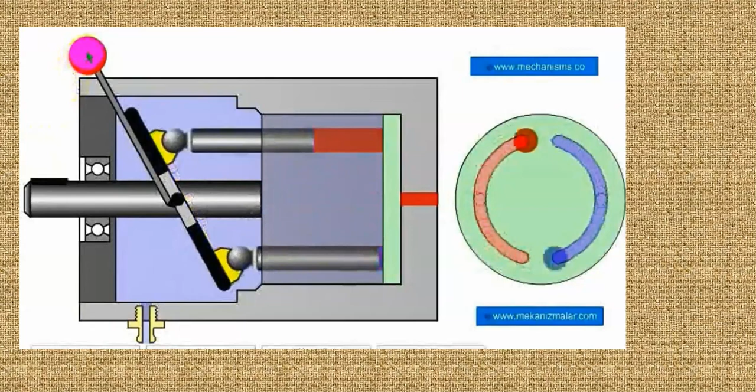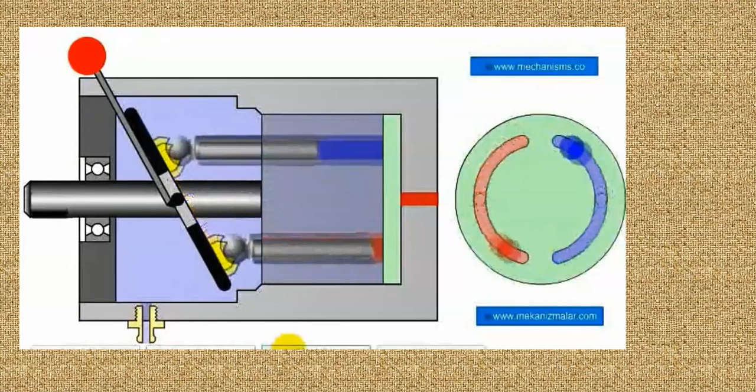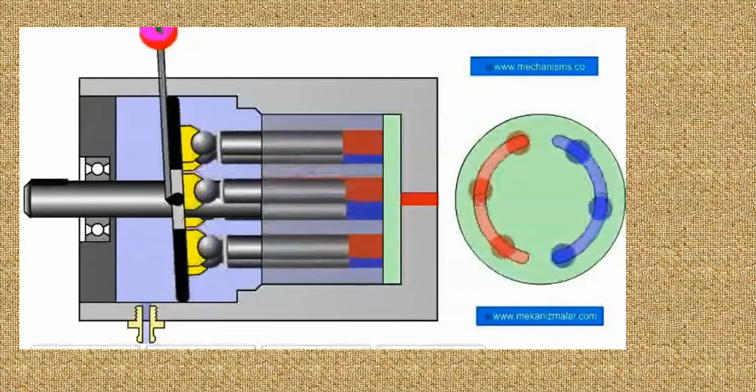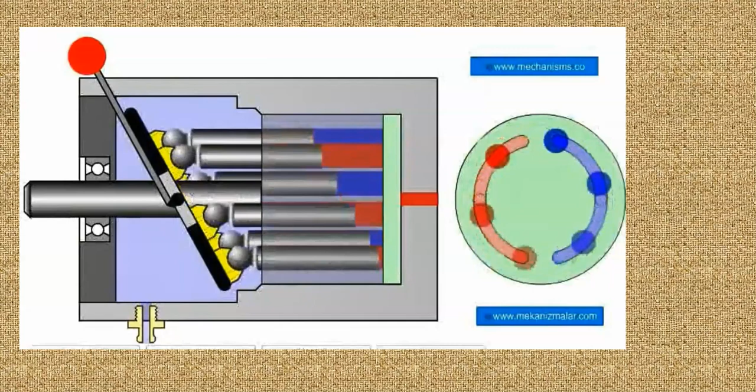Now we have two syringes. One's sucking in while the other one's squeezing out. Now we're going to increase our output. And what's increasing is how much fluid we're sucking into each syringe. It's actually a piston. Now here's all our syringes put together. So this pump has a whole bunch of pistons, and the swash plate will vary the output for the portion of flight. So if you can imagine taking off and you put the landing gear up and the flaps up, you need a lot of fluid. So this right here is the high output. The swash plate is at a high angle. When we're in cruise flight, we don't need as much fluid.

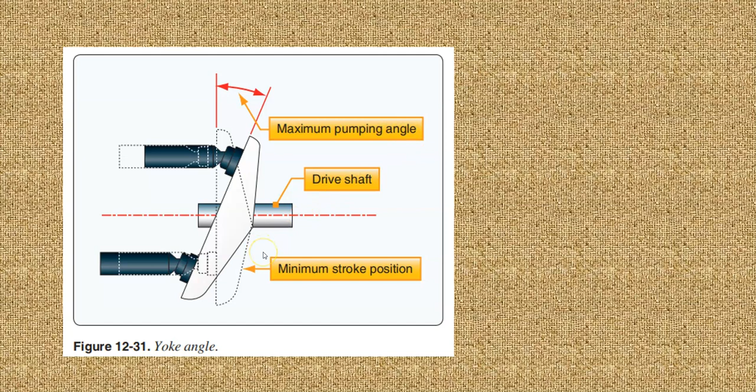So the yoke will be what changes the output. If it's slanted like this, it's a maximum pumping angle you can see here. If it's straight up like the dotted line, we're not putting out hardly any fluid. That's the minimum output. Maximum pumping angle here, and here's the cutaway. What's doing the work is the fluid coming in, getting sucked into these pistons, being squeezed out the red, and we have a compensator valve down here. This red is our output.

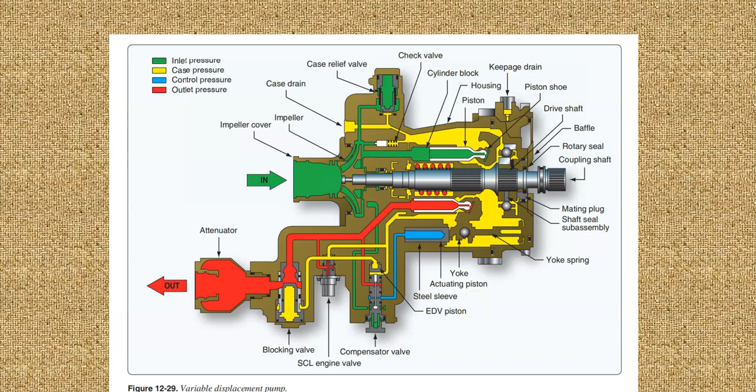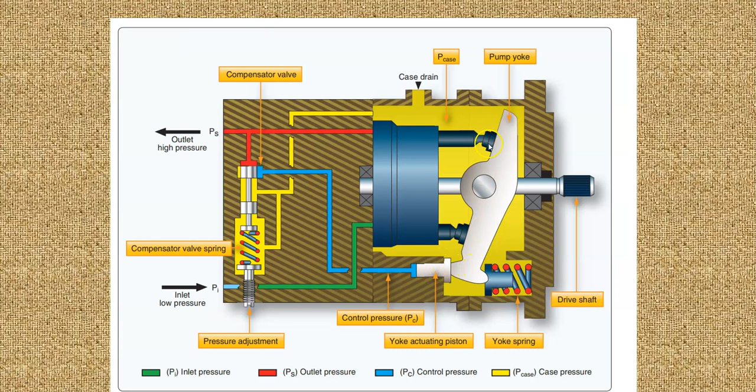We have a compensator valve, and that compensator valve is going to vary the angle of this yoke. And the yoke is what will change the angle of the pistons. This cutaway is going to show the pump yoke. This is our best view of this. The compensator pushes the pump yoke and changes how much fluid we can suck into the pistons. So that is the variable displacement portion of it.

The sensing of the pressure is what makes it all work. When the pressure drops, that yoke angle will change, and we can get more output from the pump. That's the variable displacement pressure compensated pump.